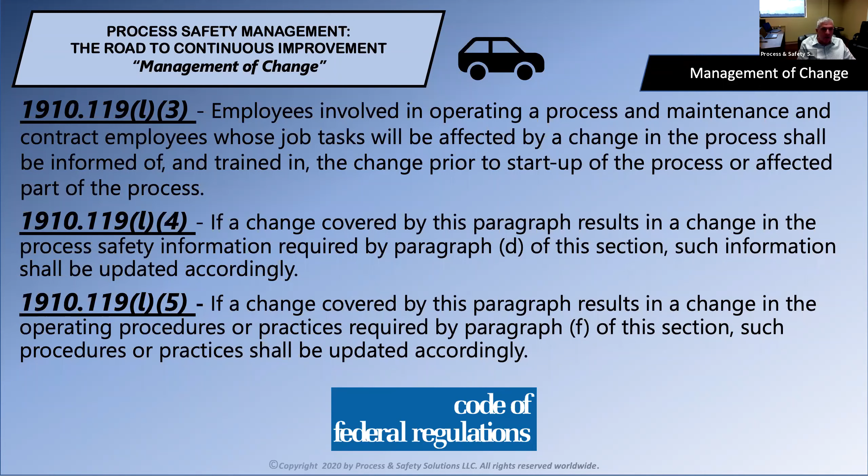Also, the last part is if a change covered by the paragraph results in a change in the operating procedures or practices required in paragraph F. And if you recall from operating procedures, paragraph F is not only your SOPs, but also your safe work practices as well. So make sure that you update safe work practices, whether they're lockout/tagout, confined space, respiratory protection, etc. Those would fall under your management of change process as well.

So what's the purpose and intent of management of change? To put it succinctly, it's to manage change to prevent catastrophic events. And how do we do that? We do that by considering safety and health effects, and by communicating that change to all affected employees, whether that's contractors, our own employees, or temporary employees that are working in our processes. It's that communication that really helps prevent catastrophic events.

It's ensuring that process safety information, or PSI, is maintained. Again, if you were here for my discussions on PHAs and PSI, the crux of PSM, or process safety in general, is making sure that that information is correct and up to date. If that information is not correct and up to date, your PHA is not going to be as efficient and as effective as it needs to be. Also, ensuring that operating procedures and safe work practices are maintained accurate and up to date as well.

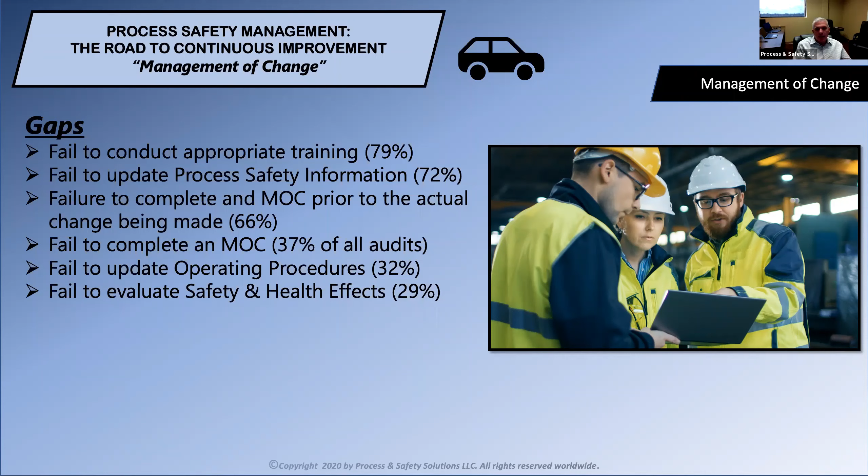Failure to update operating procedures, about 32% of the time. And then failure to evaluate safety and health effects, 29% of the time. So as you can see, there's a lot of issues when it comes to MOCs, when it comes to compliance with PSM. In general, when it comes to compliance with process safety and the things that we know that can prevent catastrophic events is completing these change reviews and managing your change in your processes.

So what are the basic elements of a good, robust management of change system? Well, first, it's a written change control policy and procedure. You need to have one of these in place. Every facility should have a change control policy and procedure in place. That policy and procedure should contain or explain how a change is managed. How do you manage the change from initiation to closeout? What does that process flow look like? Is that process flow well documented so that your employees or contractors can follow that fairly easily?

If your program and policy is so difficult to understand and follow, then MOCs will not get done. Again, if you make something easy to do, people will do it. If you make it difficult for them to do, then you can expect people will not follow that the way you'd want. So how is an MOC initiated and completed? That should be well defined in your policy and procedures and workflow.

Who has responsibility and authority? We can have responsibility, for example, to track an MOC or responsibility to review MOCs. And then you have somebody who has authority to approve all those MOCs. For example, you may have an engineer or ES&H folks in your facility that are responsible for reviewing certain parts of an MOC, whereas you should have one person that has the authority to approve all changes.

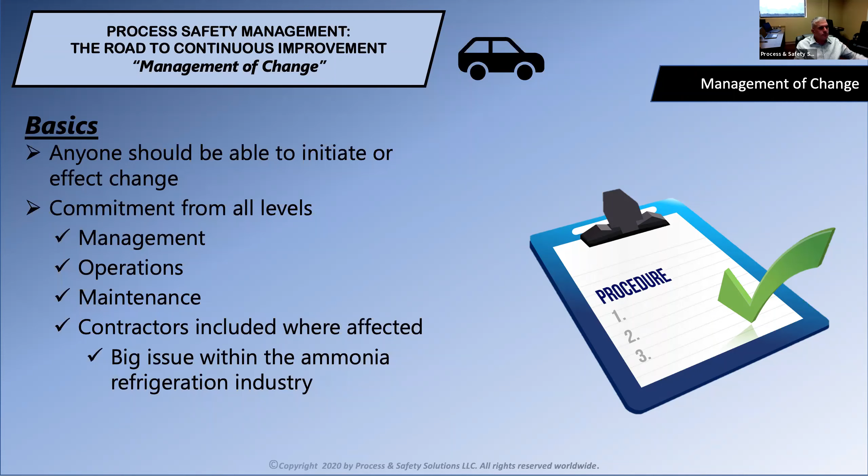It requires commitments on all levels. As I said, not only management and operations, but maintenance people need to be involved, and also contractors need to be included as well. This is a big issue, especially in the ammonia refrigeration industry, where they have contractors come in and maybe do PMs or do maintenance or additions on existing processes. And a lot of times these are done without a management of change being completed. Changes get made in the process, changes get made in equipment, et cetera. And none of that has been documented or reviewed through your change management processes.

So a typical implementation is an MOC, and most facilities have an MOC form or checklist. Some have computer systems that they can certainly use, and those are good systems to help you make the process of managing change and implementing change simple. So they all should have the basic elements of a good MOC, and the requirements are a description, a purpose, and the technical basis for the change. What oftentimes we see in an MOC is just a description of purpose, but not the true technical basis for the change.

It also must have some assigned level of risk. So what is the risk of us installing this or adding this or making this change, and define exactly what that risk is. What are the safety, environmental and health impacts of that change? Also, what is the necessary time period for the change? Is it a permanent change or is it temporary? Obviously, if your policy and procedure does not allow temporary changes, then it's always going to be permanent. You will not have a necessary time period. And then authorization for the proposed change. Who is allowed to approve that and who must approve that change?

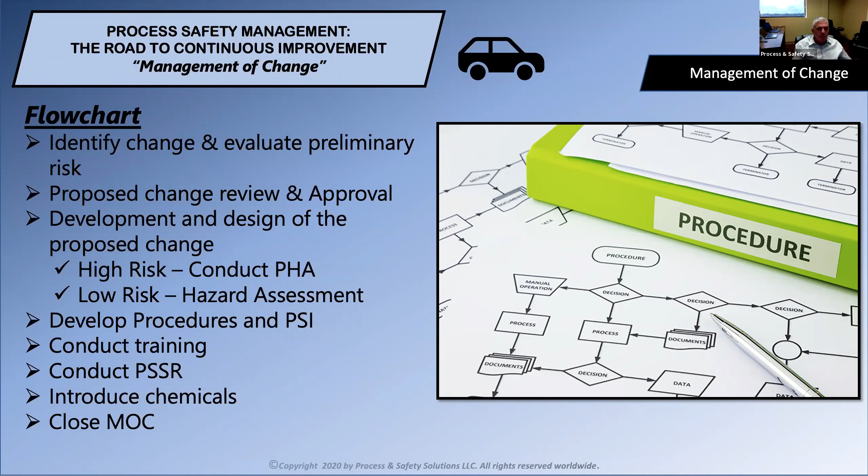And then and only then do you add chemicals. We don't add chemicals, then do the training. We don't add chemicals and then do the MOC. We don't add chemicals and then do the PSSR. We only add chemicals once we've completed the MOC, we've completed the PSSR, and all of the training has been conducted.

Then, and only then, can we close the MOC. So what happens when we change existing equipment? This is always one of the areas where we find a lot of the issues and concerns. If you go back to the definition within the regulation itself, it just says it has to meet the original design intent.

So that doesn't say that, for example, if I put in a vessel that has the same MAWP and the same temperature and the same size, et cetera, do I need to do an MOC? Well, not really, but on the other hand, you may want to consider other things that could change when you are changing existing equipment. For example, looking at process safety information. Do you have any PSI that has changed when you make that change to existing equipment? Things like material of construction, electrical classification, design codes and standards.

Keep in mind that even when you change a vessel, that original vessel may have been built to ASME Boiler and Pressure Vessel Code Section 8, Addendum M. Well, the new vessel is built to Addendum S or later, so you need to make sure you're documenting those new codes and standards. Maybe the safe limits, and these safe limits are not those in the operating procedure, but those outlined in your PSI. Maybe those have changed somewhat. So we need to look at that to determine whether or not you need to do an MOC.

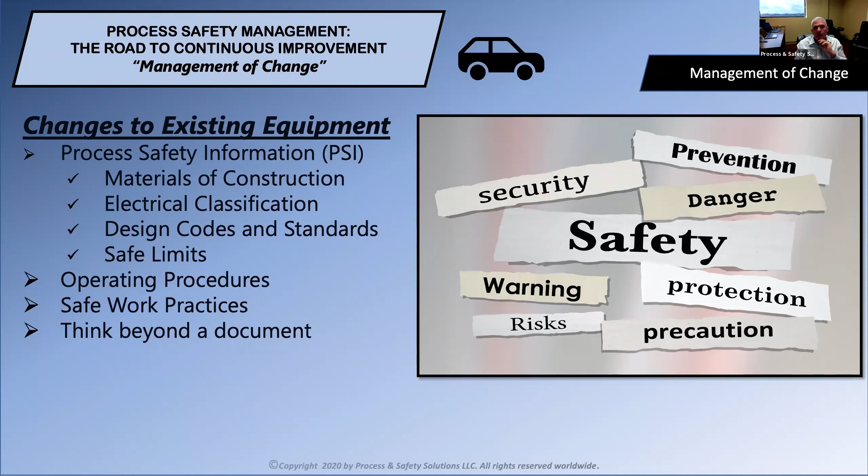Have the operating procedures or will the operating procedures change? Will safe work practices change? We always need to think beyond a document. Think in terms of when we make this change in our process, even though it's existing equipment, is that going to change anything of what we're currently doing? Is it going to change how we do our mechanical integrity inspections and tests, et cetera? Most of the time there are changes involved whenever we change existing equipment, and we need to take that into account.

Also, when adding new equipment, we know that the PSI is going to change. But what about maximum intended inventory? For example, we just came out of a facility that added a new ammonia vessel in their process. Well, they did not update the maximum intended inventory, even though they had to add more ammonia to their system in order to add it to that vessel. That didn't get changed because they thought the maximum intended inventory stayed the same.

But the other thing that occurred is the vessel was larger than any of the other vessels. So by definition, it also changed their risk management plan, or EPA RMP plan, so that needed to be updated as well. These are the sort of things you have to think through when you're making that change. Maybe your energy load analysis has changed, or your heat and material balance, and you need to look at updating that. Of course, adding new equipment is always going to involve a P&ID change, but it may also change your block flow diagram.

Equipment specification drawings, all of that needs to be gathered as part of adding that new equipment, including material of construction, design codes and standards, etc. The list can go on when you're adding new equipment. It can touch every element within your process safety information element within PSM. Of course, adding new equipment is going to require new operating procedures. It's always going to include new mechanical integrity inspection procedures. Spare parts need to be looked at.

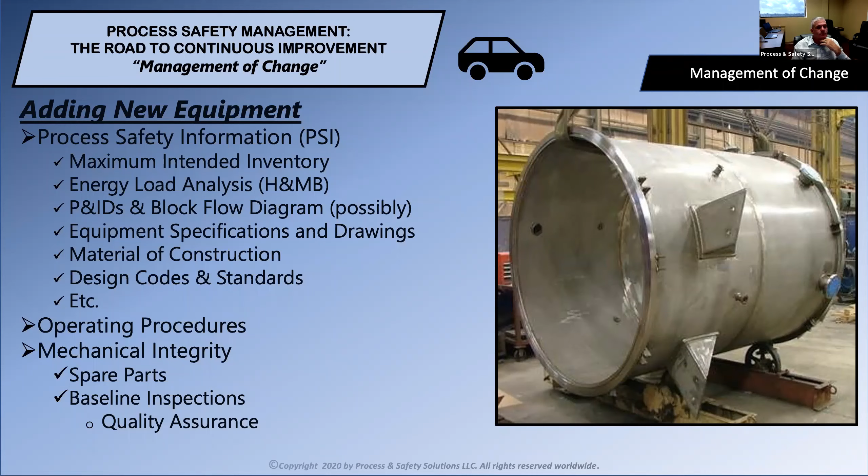And then baseline inspections, especially if you're installing equipment in a midstream process, a refinery, or a chemical plant. Those baseline inspections need to be gathered. Baseline inspections may be thickness readings. Thickness readings when the vessel is put in service are important to determine your short-term and long-term corrosion rates. Certainly, you can use historical data, from the equipment itself or a similar piece of equipment next to it, or based on a similar process that you have. But in any case, establish the baseline readings to establish your corrosion rates and your remaining life before chemicals are added.

So other things to consider in a change is the composition of raw materials. Certainly, this may not affect processes like ammonia refrigeration, but in other processes, compositions of raw materials change all the time. There's a lot of midstream processes where the composition of the input of the gas coming in changes, and therefore this needs to be considered as part of the change.

Process variable or property within an existing system. So if I change the process variable within my process and it affects my operating limits, then certainly an MOC needs to be generated, whether that affects the normal operating or the high and the low. We certainly need to update that PSI, and of course that needs to be done through your MOC.

How about changes to production rates? Certainly if those production rates go above the design of the facility, then there's a management of change that needs to be completed.

Changes to impeller size on a pump. So many times we get in facilities where we ask what the impeller size is in the pump. A lot of times people will not know what that impeller size is. Well, that impeller size can affect a number of things in your process plant. For example, if I change the impeller size from a 6-inch to a 6.5-inch, that increases my flow, that increases a number of things, but it also increases my deadhead pressure.

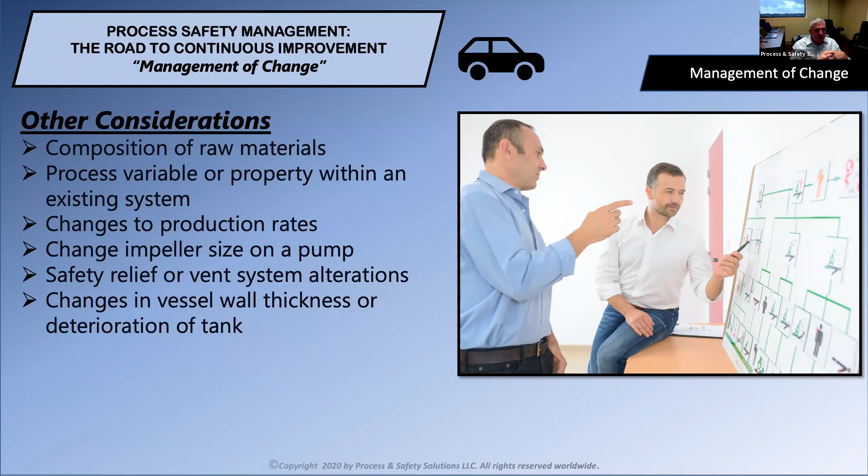For example, you take some thickness measurements and that thickness is below the design thickness of the vessel, assuming that it's outside of the corrosion allowance that vessel was provided. If it was given no corrosion allowance, then certainly an MOC should be initiated, and then any fitness for service evaluations conducted to determine whether or not that vessel can continue to run in its current state, or if modifications to that process need to be made.

Other things are changes to protection or safety systems, and what we're talking about here is normally critical instruments or LEL detectors, ammonia detectors, hazardous gas detection, etc. Any changes to those systems, whether it be in alarms or the actual change of the device itself to a different type, all of those would have to be covered under an MOC.

How about taking critical devices out of service or temporarily out of service? In other words, bypassing them while you're doing some testing or inspection. Certainly, if you don't have a written procedure for doing that as part of the testing process, then conducting a temporary MOC perhaps is the answer to address that issue.

Also, critical equipment safeguards and things in the PHA. If you change any of the safeguards that you have listed in a PHA, for example, then you certainly need to do an MOC, whether that's changing the alarm set point, changing the trip set point for a shutdown, etc. All of those things would need to be covered through an MOC.

How about ITPM, or inspection, testing, preventive maintenance procedure change? Remember, we said the MOC covers anything that is covered in F4 of the standard, or F of the standard. Well, F4 really addresses all those safe work practices, including ITPM procedures. So if you change a procedure in how you inspect, test, or provide preventive maintenance, then an MOC needs to be done. Again, the MOC helps ensure that communication is taking place and that training is provided to make sure that they understand what new procedures you have in place and how to execute that procedure.

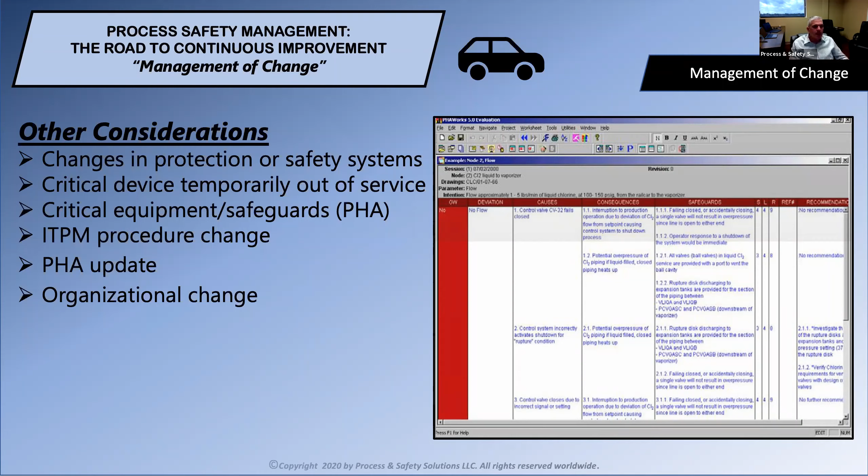So when you do a change in your organization, it makes it much easier to hand that document off to that person that's taking on that new role, so that they understand what their role and responsibilities are and what they need to do.

So here's some examples that I always throw out there when I do training on MOC. I always talk about making sure that we understand change, and making sure that we can see the things that could be affected when we make a change. And this is often covered when we talk about replacement in kind. And I give the example of the replacement of a pump. If the pump meets the original design specifications, then theoretically, according to the standard, an MOC would not need to be generated.

For example, what if the manufacturer's name is different? What if the model number is different, and the serial numbers are different? All of this doesn't go to address the design, because the design intent is the same. It's still going to output 250 psig worth of pressure. It's still going to output the 400 GPM, for example, that it was designed for. So the original design intent is the same, but all of these items have now changed: the manufacturer, model number, and serial number. So what are the things that we need to consider in this?

Obviously, mechanical integrity is one of those. Spare parts is the other. Obviously, you're not going to be able to get the same parts for that pump as you had before that might be set up in your stores spare parts inventory. Those will no longer fit that pump. Also, baseline inspections need to be done. And then quality assurance. Quality assurance is making sure that the pump is installed to the manufacturer's requirements as well.

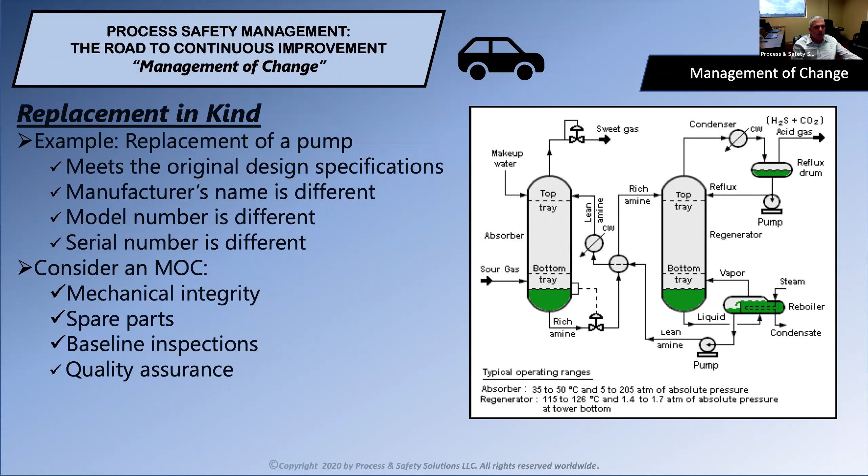So if we generated the MOC, even in the replacement of a pump, which we would consider replacement in kind, we make sure that all of these things get addressed. We make sure that the spare parts are replaced. We make sure that it was installed according to the OEM's requirements. We make sure mechanical integrity procedures are in place and they're updated to the requirements of the manufacturer of the pump, which may be different than the previous pump that was installed.

The other thing is, when should we do a formal hazard review or a PHA? Well, certainly these are the items we say should require one every time. If the change introduces a significant source of energy, whether that's chemical, mechanical, thermal, or electrical. If you're increasing your source of energy, then obviously we recommend that a formal PHA be done. If the change can result in an increase in toxic, flammable, or reactive material, in other words, you're increasing your maximum intended inventory, a PHA should be done.

If the change can significantly increase the potential for personnel exposure. So if the change is going to result in an increase of that exposure, then by all means, a PHA needs to be completed. If the change takes the process outside the current operating limits, and I want to make sure that that's clear, operating limits.

So if you're going to move closer to the safe limits or the limitations of the equipment, by all means, we should be doing a PHA to make sure that we address the hazards associated with that. Moving outside those operating limits means we're closer to the design limits of the equipment, which means that there's a bigger potential for loss of primary containment than there was prior to that change.

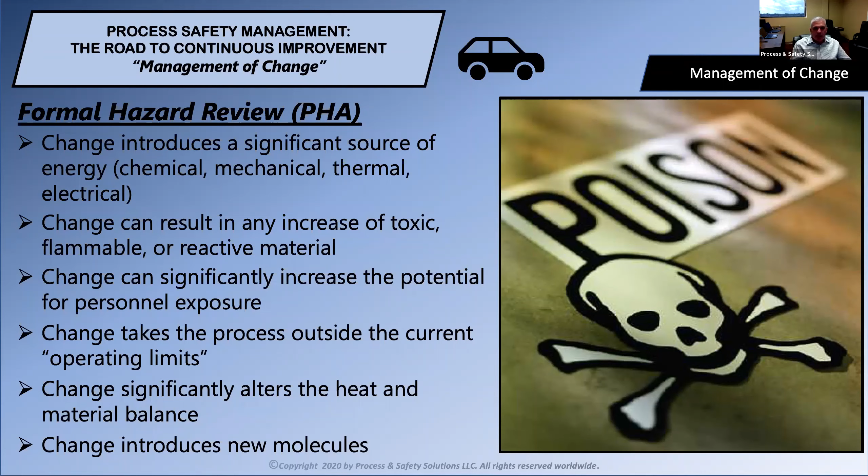Of course, if you introduce new molecules or new chemicals or new materials into your facility, whether they're PSM covered materials or not, then we suggest that you do a PHA. And the reason for that is certainly if you're introducing those new molecules into an existing process, and that process is already covered, then that certainly has altered your process and you need to do that PHA.

The other thing is the emergency MOC. So if your policy and procedure allows for emergency MOC, which you certainly can have, it should be documented in your MOC policy. These are types of changes that can be done without a formal MOC being completed. For example, I need to make a change immediately. I go out there and make the change, and I don't go through the whole formal MOC process until operations resume later on. But certainly I should have contingency plans in place.

I don't want to do that in a vacuum. I don't want to do that without addressing the safety and health concerns. We still want to do all of those same things, we're just bypassing some of the process steps along the way. We shouldn't be bypassing any process safety steps along the way, however.

Some of the things we see that are often missed is changes in metallurgy. And we hear quite often that stainless is better than carbon steel, so I don't need to do an MOC. Well, that's not always the case. For most of us in the process industry, sometimes stainless steel is worse than carbon steel.

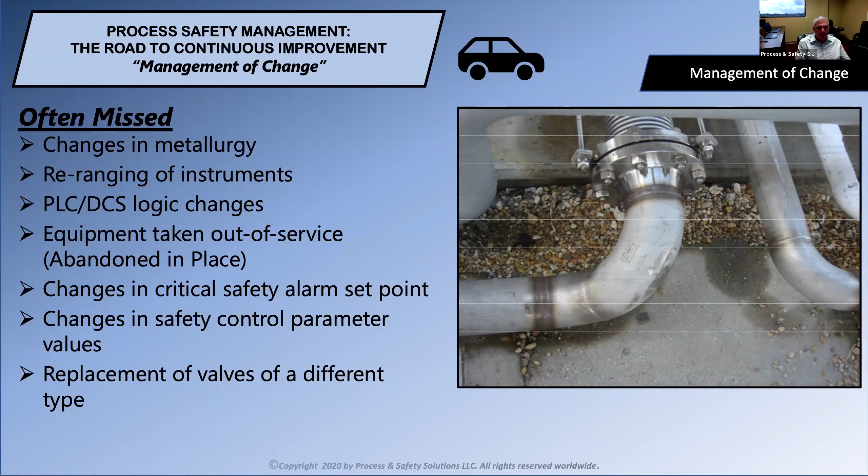Obviously, if the valve being changed is a different metallurgy, then that would require an MOC anyway, as we talked about earlier. How about your emergency response program? Changes to roles and responsibilities. Roles and responsibilities may be who does the accounting of personnel. Maybe those that are your first responders or responders. If that list is in there and that changes, then obviously that needs to be updated and taken care of through an MOC.

And then changes to the plan itself. Maybe the contact information is different and the people who are involved and who does a shutdown in the event of emergency, who stays behind, et cetera. If those changes are being made, that all needs to be covered through an MOC. Remember what I said earlier about the fact that safe work practices, whether that's lockout, tagout, confined space, HAZCOM, et cetera, if those are changed in any way, those changes should be communicated and done through an MOC process.

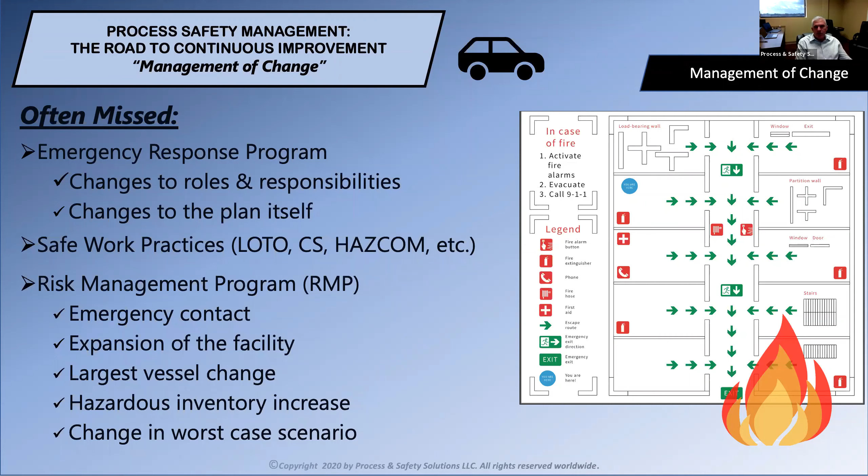The other things to consider is your risk management programs or your RMP. Maybe your emergency contact has changed. Maybe you've expanded the facility. The largest vessel has changed, or hazardous inventory has increased, or you've had a change in a worst case scenario. All of these things, if you have a good MOC and a robust MOC program and checklist, you'll catch most of these as you're going through the change approval process.

So always remember, and really to make your MOC better, we need to track MOC related documentation and action through your PSSR. Remember, if we've got a good, robust MOC program, it's going to translate, hopefully, to a robust PSSR program as well. So there's really a double check of making sure that all of the things that you have agreed to as part of that change are getting done and checked off on when you go through your PSSR.

We have to have a method for conducting and documenting training. When it comes to training, so often what we see is operators or maintenance or operations personnel are sent an email, or they're sent a document that says this change has taken place. Do you agree? And what is the operator going to do? Well, they're going to sign off whether they understand it or not. And I will tell you that most of the time they didn't understand.

Well, what I'll do as part of my audit, when we do compliance audits, is we interview employees like probably most people would do. But we'll pull some of those MOCs and we'll ask specific questions about the MOC. So most of the time, operators will not have the answers to the basic questions that we are asking about that MOC, mainly because they signed the document that said they understood, but there really hasn't been any verification that they understood the training that was provided, because they were just asked to check off.

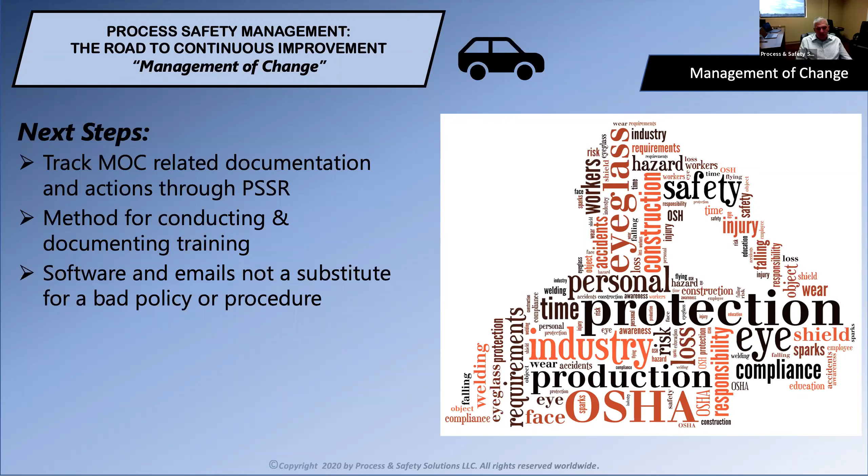A lot of times, people will use the email and automatic replies to indicate that the person understood and was trained on the change. That is certainly not acceptable from a process safety standpoint and making sure that people understand that change. Software and emails, not a substitute for bad policy and procedure. A lot of times people will have software that manages their change and emailed processes to do that as well, but really that's just a bad policy and procedure that needs to be addressed.

Always perform reactivity testing for new substances. If you're adding a new substance to your facility, then do reactivity testing. Always review compliance and safety loss prevention requirements. Maybe your facility has those in place, and if they don't, certainly you should develop those policies and procedures as well. Complete a maintenance review and revise spare parts list. There's nothing worse than having a breakdown where no spare parts are available, or two, the wrong spare parts are installed on equipment that was not designed for that part.

Can't recall how many times we've seen that one on incident investigations. Always evaluate change against vent, relief, and flare capabilities. This is often missed, especially when pumps get changed or process changes occur. We don't look at all of the scenarios that have to do with relief.

Review existing permits. For example, you may have an operating permit or environmental permits, making sure that those get updated in the process. As you can kind of see when we look at these next steps, it really has to do with, again, creating a robust MOC checklist and a PSSR checklist as well. If you have those two things together and they mirror each other, we'll not miss those things when we get ready to add chemicals.

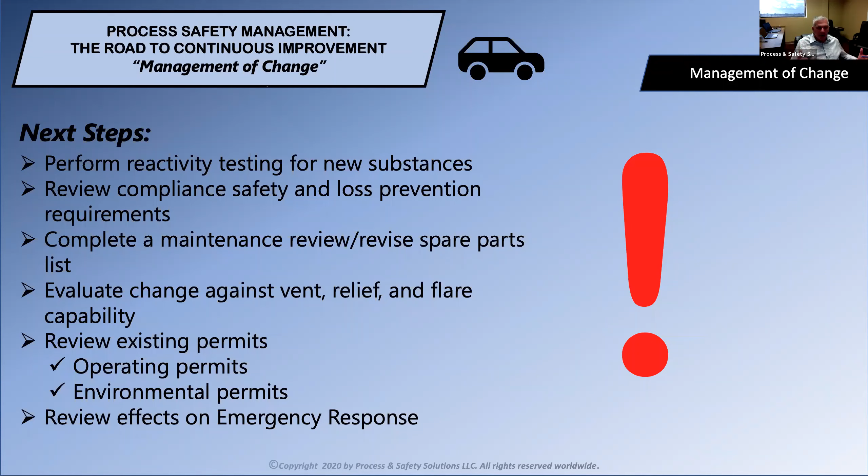Always review the effects on the emergency response. Do you have the personnel that can respond to those new chemicals, for example, or the new process that you're installing? Again, it's always important to obtain required approvals. So nothing worse than having an MOC that has been done, but nobody's approved it.

Complete industrial health or industrial hygiene, safety, all safety reviews. A lot of times when we talk about industrial health, what we're referring to there is making sure that if you're adding a new chemical to your process, maybe your employees have to be monitored on some frequency to determine whether or not there's any industrial health issues that need to be addressed.

Maybe there's noise concerns. You're adding a piece of equipment, now you're no longer below the 85 decibel requirement, so therefore you may have to require noise and hearing protection in your facility. So making sure you're doing these reviews is important.

Complete training on change for affected employees and contractors, and it should not be just a sign-off sheet. And you'll see here that I've added contractors to this list. If you've got contractors that are coming in and doing work in your facilities, and they're working on a specific piece of equipment, and they've been doing that for a while, then certainly it's important that they get trained on that change as well, or at least have some understanding of that change prior to them coming in the next time.

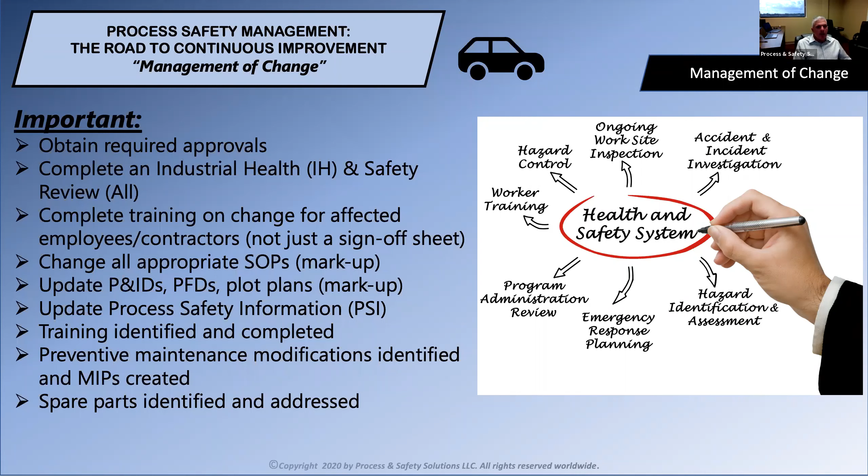Also update process safety information. I can't emphasize this enough, to make sure that our PSI is always accurate and current, and that we're addressing those issues as well. Training is identified and completed, preventive maintenance and modifications identified, and MIPs created as well, MIPs being your maintenance inspections and PMs, and then spare parts identified and addressed.

Also remember, a temporary MOC must be returned to original conditions when completed. Oftentimes what we see when a temporary MOC is expired or is completed, they'll leave behind things like connections to a piece of pipe or connections to a vessel that weren't there before, etc. If those connections are being left behind, then you need to create a permanent MOC to install those, to make sure that the P&IDs and all the other documentation is corrected. So don't leave things behind.

It needs to be totally the way it was prior to the temporary change, or a permanent MOC generated to address those. More complex changes require a formal hazard evaluation, including a PHA. Always check code standards and internal engineering specifications to determine whether an MOC is necessary. Always complete a pre-startup safety review, or PSSR. Again, absolutely no addition of chemicals until all the changes are complete. And again, you can use or mark up SOPs, etc., as needed.

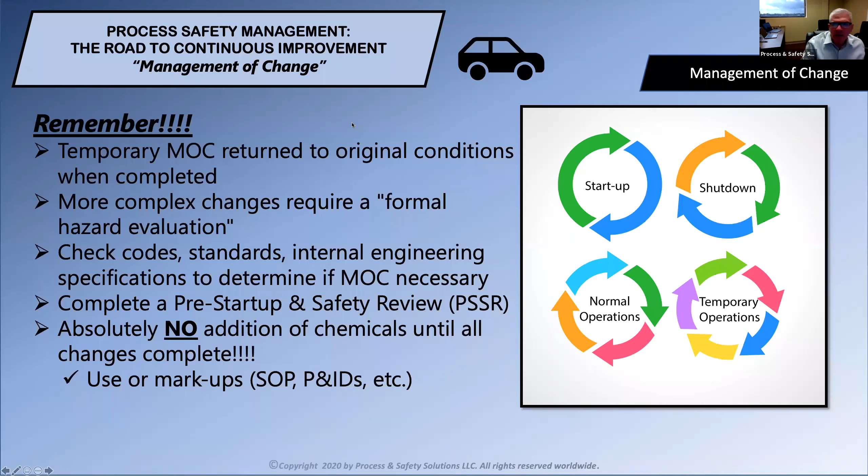Okay, I think I'm back now. For some reason or other, I lost my feed. Okay, so are there any more questions that we have?

And for those of you who don't know, IIAR is the International Institute of Ammonia Refrigeration. So for those of you in the refrigeration industry, as was pointed out, major and minor was taken out. And I know I had a discussion with IIAR a number of years ago about that as well, because nobody understood what that was.